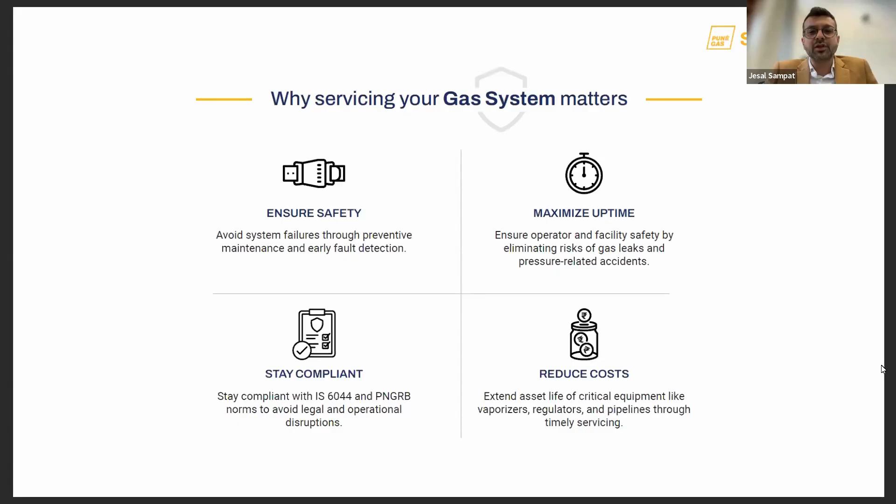So these are the four most important points: safety, time, compliance, and cost. And I'm sure for every business, these four things are important. Safety is important, time is important, compliances are important, and costs are the most important, right? So these 4 points are why we want to share with everyone, and we want you to ensure to service your gas system at the right time in the right way.

Now, what is the right time? What are the compliances in India? What does the rule book say? Let us have a look at that.

So in this table here, you can see we have listed down the three different categories of a gas system. A customer could have a gas bank and an LPG gas pipeline. So for a LPG gas bank, the norm applicable is IS 6044. The inspection or the certification agency is the authorized agency approved by the LPG distribution company.

So the company that is supplying the cylinders, that company has to approve according to IS 6044, and that is what is written in the rule book, that the authorized agency approved by the LPG distribution company can inspect and certify the LPG gas banks. And what is the frequency? The frequency is once in 6 months. Yes, once in every 6 months, the LPG gas bank has to be inspected by an authorized agency.

Then we go to LPG gas pipelines. Your gas bank is your storage of the LPG, but that LPG is taken from point A to point B to point C. So from a storage location, you will have a LPG pipeline running through your factory, through your kitchen, through your manufacturing facility or location. It could be a 100-meter pipeline, or it could be a 5-kilometer pipeline, depending on the size of your factory and your business.

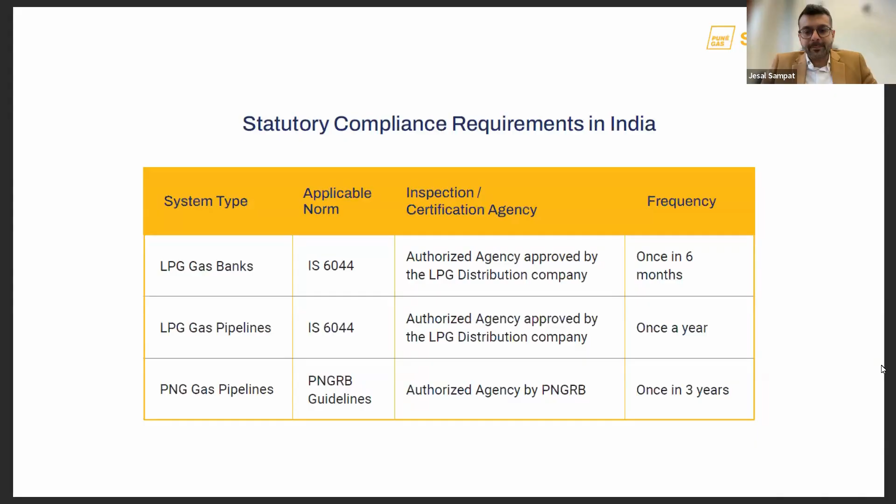So of course, if it is a new pipeline, a new project has been completed, it has to be done at that time when the new project is completed and handed over and when the gas is charged. But after that, it has to be done every 3 years, right? Once in 3 years, it has to be tested according to the PNGRB guidelines. Okay. This is the statutory compliance.

After this, we come to the different categories and sizes of LPG systems. Now, this is something that we as Pune Gas have taken the initiative to categorize the different sizes of the LPG gas banks. So we have categorized the sizes of gas banks of LPG into 3 different sizes. The first one being wherein a customer is using LPG from 0 up to 10 kg per hour. So it could be a very small installation, a very small restaurant, a very small hotel, or a very small factory.

Up to 10 kg per hour would mean that the customer could use VOT cylinders of 19 kg. They could use LOT cylinders of 47 kg or 33 kg. And mostly these are all the users that are using LPG for cooking and smaller applications up to 10 kg per hour. So that's how we have made the first category. The second category is from 10 kg per hour to 100 kg per hour.

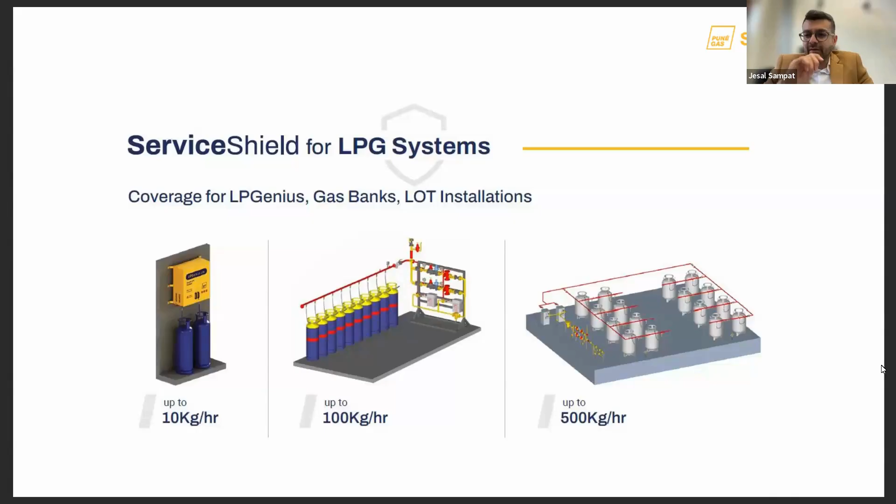And for these three categories, what are the most common components that need to be checked and serviced? So for all the three categories, this is an extensive list of components that will be used by these three sets of customers, whether it's 10 kg, 100 kg or 500 kg. There could be cases where the customer is using a vaporizer or not. If it is a LOT customer, there would be a vaporizer. If it is not a LOT customer and a VOT customer, it would be 19 kg cylinders where vaporizers are not used.

But all of these components, the LPG manifold assembly, the adapters that fit to the cylinder, the hose pipes that take the gas from the cylinder to the manifold, the non-return valves, the thermal relief valves, pressure gauge, ball valves, which are there in the gas bank, Y strainers that basically filter out the liquid particles or the heavy hydrocarbons in the liquid LPG, the LPG vaporizers itself, the filters, regulators in the high pressure gas trains.

In the first stage gas trains, we will have filters, regulators, safety relief valves, flame arresters, overpressure shut-off valves, and of course there will be leak detection sensors, leak detection systems, which make up the entire LPG system or the gas bank. So all of these components need to be checked and serviced, and ultimately the entire system integrity needs to be checked along with the compliance review.

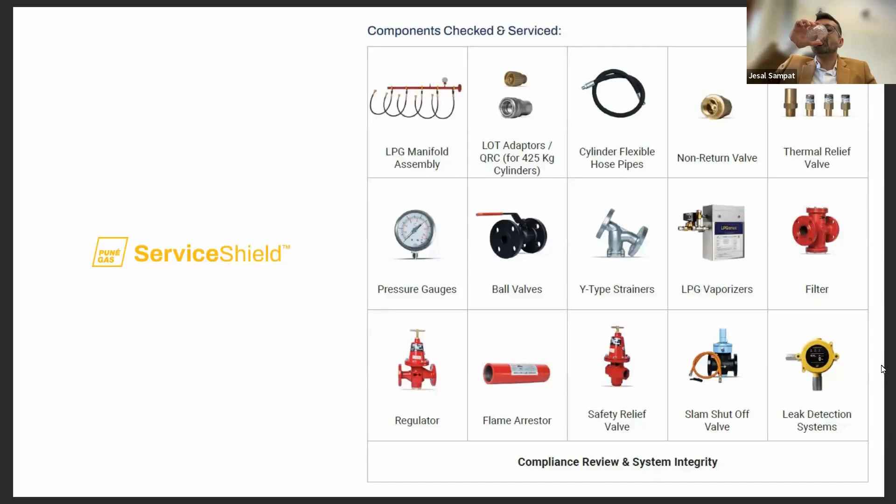So has your gas bank been tested? When was the last time it was tested? Is it safe? Is it following the standards? All of these are the important elements to be checked in the gas bank. So we have then created a standardized offering for these LPG gas bank systems and these users.

I will not dwell upon this in much detail right now, but we have categorized the packages to service these LPG systems into basic, plus and pro, wherein the basic servicing would have only one service in a year. Number of visits would be one. The plus would be having 4 visits in a year, and the pro package would be having 6 visits in a year. And of course, there are different inclusions in all the three packages, and we can explain to you separately based on your requirement, what are the inclusions, what are the costs, etc.

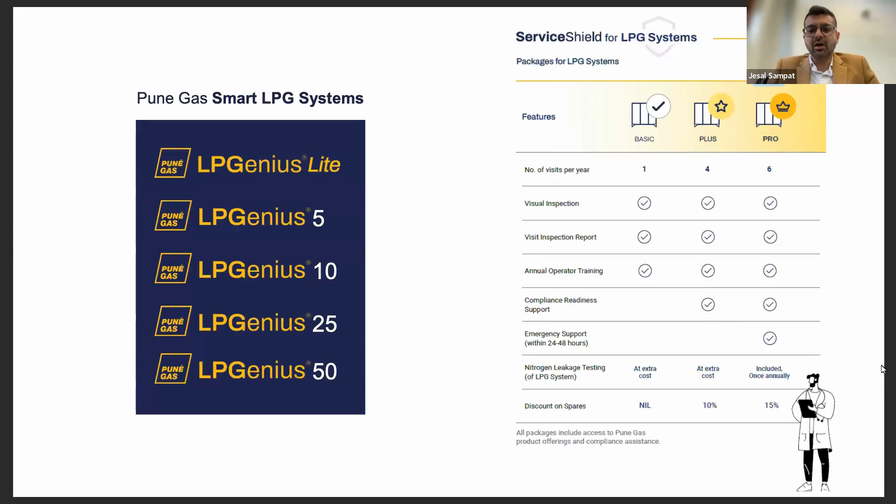But what we want to try and do is make it very simple, easy, and a standardized approach to the entire way that LPG systems are serviced, maintained, and checked. So there will be a standardized checklist that will be created and used for your LPG system, and that will become the basis of your inspection and the certification that needs to be done according to the compliance.

We then come to our LPG vaporizers that need to be serviced. Again, the LPG vaporizers are of two types. One is a dry type vaporizer and the second one is a water bath type vaporizer. The water bath type vaporizer needs a little bit more servicing than the dry type vaporizer. And the way that the water bath type vaporizer needs to be serviced is a little bit more cumbersome and time consuming than a dry type vaporizer.

So even your vaporizer should be serviced at least once a year, if not more. Once a year, your water bath type and dry type vaporizers could be checked and cleaned, and the way of servicing and cleaning these vaporizers is mentioned on this slide: we have to functionally check the heating elements. We inspect the temperature and the pressure safety devices. So there are pressure relief valves, there are safety relief valves in the vaporizers. We need to check them.

We need to descale and clean the vaporizer body. Specifically, if it's a water bath type vaporizer, we have to drain out the water. We need to descale it. We need to remove all the rust, thoroughly clean it with specific chemical solutions, and then fill it again with fresh water for it to again run properly and give you a better and a longer life.

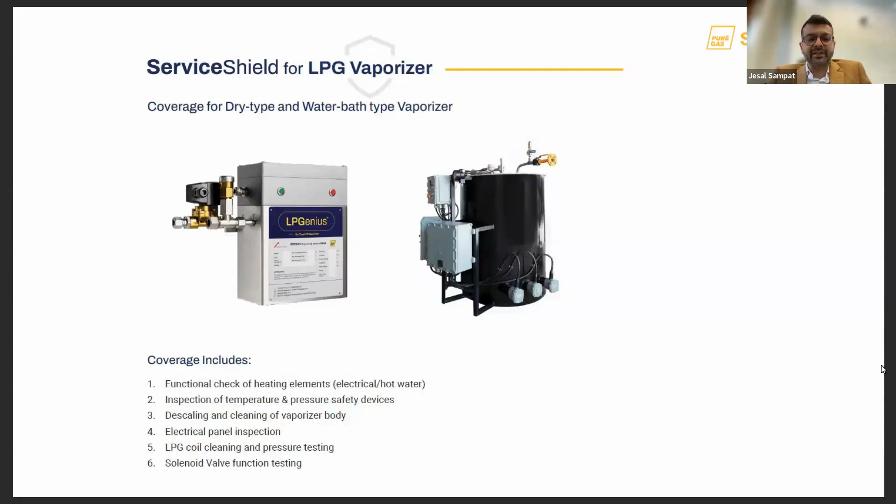So these 6 steps have to be taken to check, clean, and maintain the LPG vaporizer, whether it's dry type or water bath type. We then come to the compliance part for the LPG system or the LPG gas bank, as people call it. And what is the third party certification for that? So like I told you in the earlier slide, the compliance for the third party certification is mentioned according to the IS 6044.

And again, we categorize it into 3 categories and models: 10 kg per hour, 100 kg per hour, and 500 kg per hour. And for these 3 systems, the inspection and the certification criteria and the method and the process to certify is exactly the same. It will only differ based on what components are there and not there, but the criteria and the SOP remains the same. So these are the 6 points that are important and how the certification and the inspection has to be done.

The first thing that we do is that we test the entire gas bank pneumatically using nitrogen gas at 1.5 times of the working pressure of the gas bank. So we take nitrogen, which is an inert gas, and we pneumatically test the entire system. We then check the flame arrestor and the safety relief valve as well, if it is clean and if it is working okay, if the safety relief valve is opening at the set pressure that it is set at.

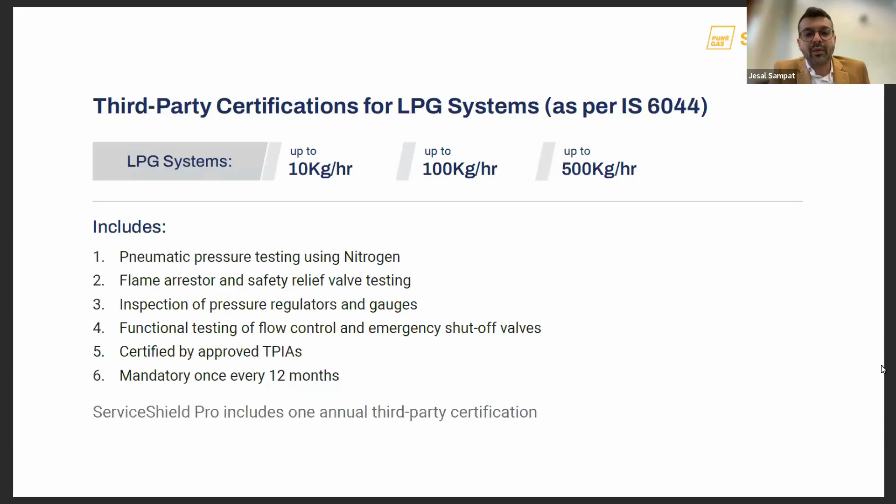So after this was regarding our LPG system and the gas bank. After this, we come to gas pipelines. So these gas pipelines could be for LPG or for natural gas, right? For both the gases, it could be a common, same pipeline that was maybe once used for LPG, but now is used for natural gas or vice versa. And whether it's a customer using LPG or natural gas, the pipe diameters remain the same. The pipe length is something that is customized from customer to customer.

So in this, the pipeline inspection and the certification, we have categorized the entire customer application and the requirements based on the pipe diameter and the pipe length. So the first categorization is the pipe diameter. So if a customer or a user in a factory or a kitchen or a commercial building is having a pipeline from half an inch, 3/4 inch, 1 inch, 1.5 inch till 2 inch, right from 15 mm to 50 mm in diameter of pipeline, then that comes in the first category.

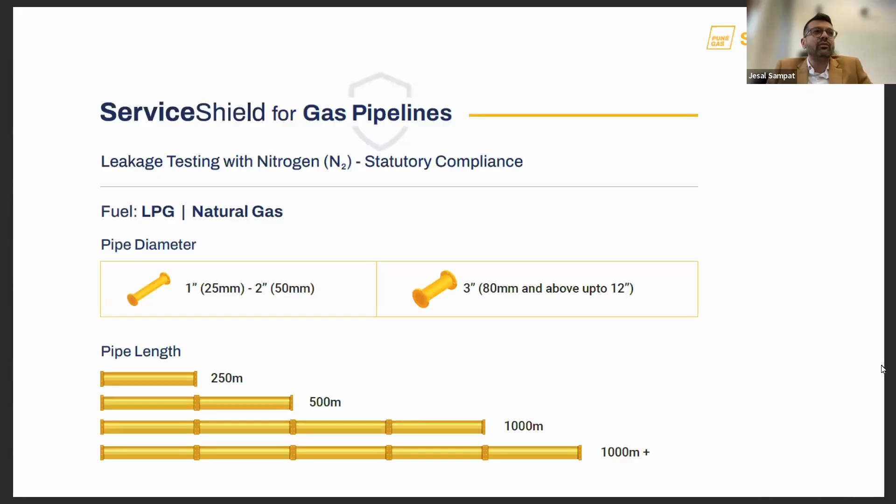So the categorization is depending on the length, because we need to also find out how much nitrogen will be used, how much time will be needed, how many people will be needed to test, let's say, a 1 kilometer pipeline. It would definitely need more nitrogen than a 100-meter pipeline, it would definitely need more people, it would definitely need more time. So that's the reason we have categorized in such an easy way, so that for every user it could be easy to identify what is the diameter and what is their length in a very, very simple way.

And in the same way for the gas pipeline, what do we test? Of course, we check the entire pipeline. We test it with nitrogen gas. Like I have already told you for the gas bank, we test it using nitrogen at 1.5 times of working pressure. So the working pressure for LPG could be different. For natural gas, it could be different. So we will test at that facility or that building or factory with whatever is the working pressure at that place, using nitrogen at 1.5 times of the working pressure.

We will check the flame arresters and the safety relief valves again. The pressure regulators and gauges have to be inspected. Again, the functional testing of flow control valves, emergency shut-off valves, any electronic solenoid valves in kitchens where gas leak detection is there. Any component that is attached to the pipeline, installed in the pipeline, which is a part of the entire gas pipeline of that facility, will be tested and checked.

For LPG pipeline, the certification body and the applicable compliance is as per again Indian Standard 6044. And for PNG pipeline, for natural gas, PNG, CNG, whatever you may call it, it is again as per PNGRB guidelines, which is, I will repeat, Petroleum and Natural Gas Regulatory Board. Point number 6, I have told you it is important that we do the testing every 12 months for LPG and every 36 months or 3 years for PNG, like I have explained to you in my slide earlier. So for LPG every year, for natural gas every 3 years.

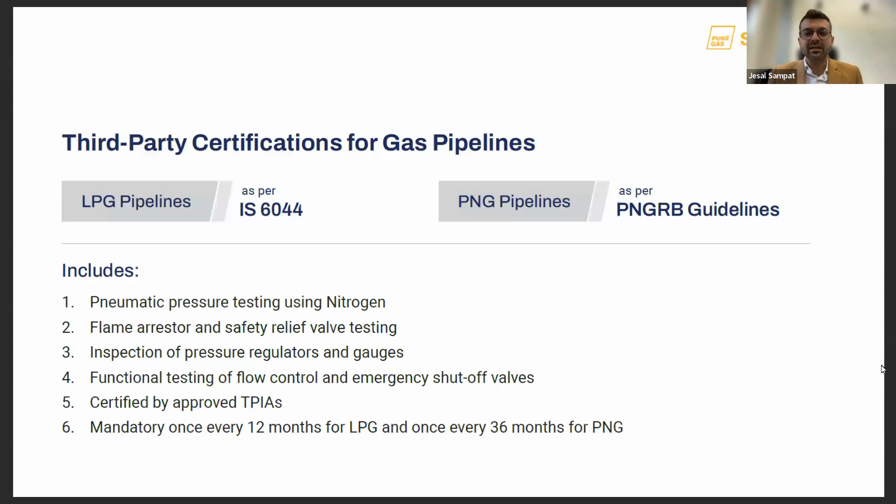With this, the last couple of slides before we end and before I can take your questions. With the entire ServiceShield offering, we are going one step further and we are taking up a responsibility, a social responsibility as a company to ensure maximum users of LPG in India are safe, are using their LPG system in a safe way.

And for this entire responsibility that we have taken, we have launched the first time in India something called a health audit for a gas bank. Health audit basically means a thorough safety inspection for your LPG system, a thorough health checkup for your gas bank, like you go to a hospital and get your health checked.

In the same way, we have compiled a very, very consolidated, exhaustive list of parameters right from the Indian Standard 6044 guidelines and rules, international best practices, the NFPA 58, which is the rule book in USA and is used by many other countries, European standards, and whatever best practices standards are there across the world, which apply for Indian conditions, which also take care of Indian temperatures, Indian real world scenarios.

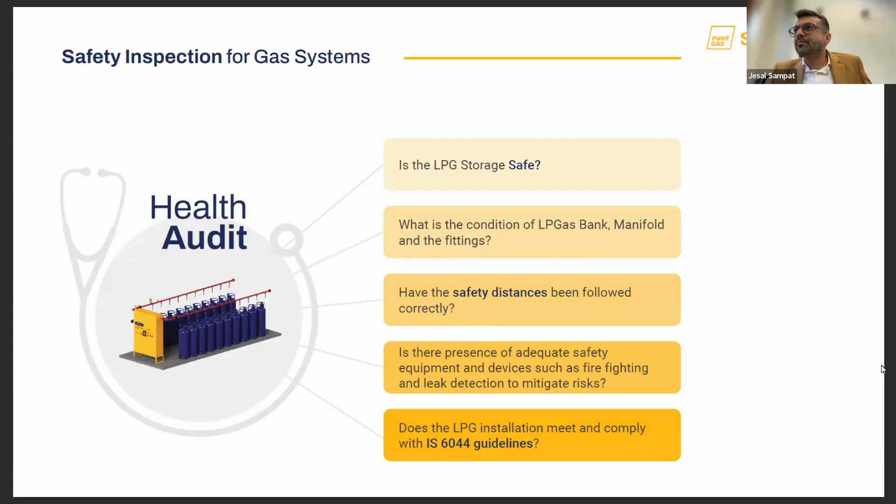And last but not the least, some of the other offerings and value added services that we offer apart from these standard packages, starting from PESO licensing and certification. So for customers using bulk tanks, bullets, bulk LPG installations, the third party testing, the PESO certification, licensing, and the degassing and de-licensing of bulk installations as well we are doing. For example, if a company has a bulk installation and is getting a natural gas pipeline supply, then they want to de-license and degas the tanks. That also is part of our service portfolio.